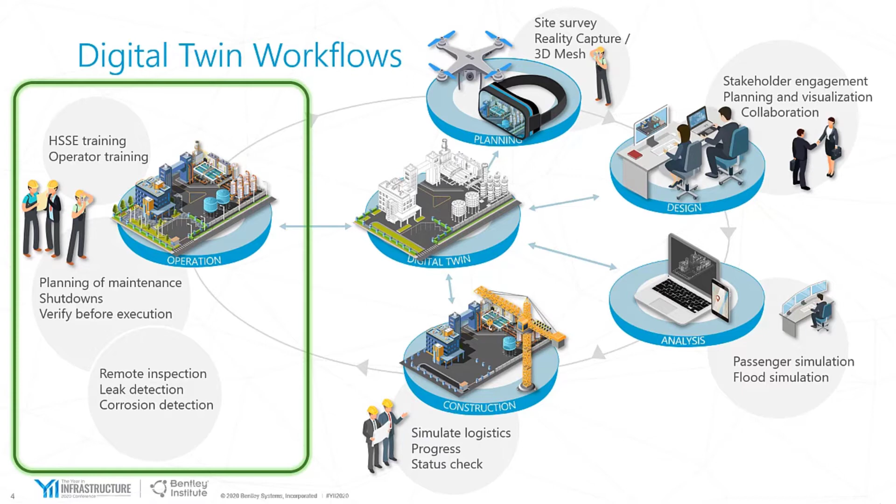To do that, I want to look at these use cases. I want to look and dip into some simple visualization. I want to show how we can expand and build on that to provide operational information, and how you might use it as part of a familiarization process for new workers or unfamiliar workers that are unfamiliar with a particular location.

I want to step back and show how visualizations and how we can link that information we have into a more traditional reporting. So for each of these, I'm going to step through a simple use case and give a brief demonstration and then step on to the next.

So really, what I'm going to do to start with is just show an example of a user using the system in order to step through, find some information that they're looking for about a particular asset in the site, and then say, I'd like to see that asset, and navigate some further information from there.

So here we have the AssetWise ALIM interface. We're going to search for a pump. That is PP3101. It gives the functional information of the centrifugal pump.

And here we are immediately given the tag information, so you can see there's lots of attribution about that tag that's available, as well as the related information.

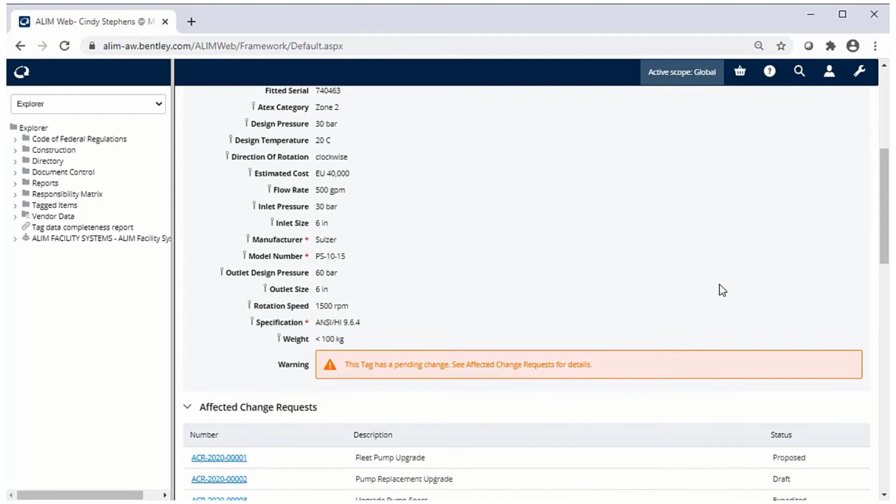We can then also see the history of this tag and what equipment has been installed in there, as well as the auditing that has gone into the updates.

But what's most important, we're going to go and see this asset from a visual standpoint within the model. So we've loaded the model and we zoom right into that asset.

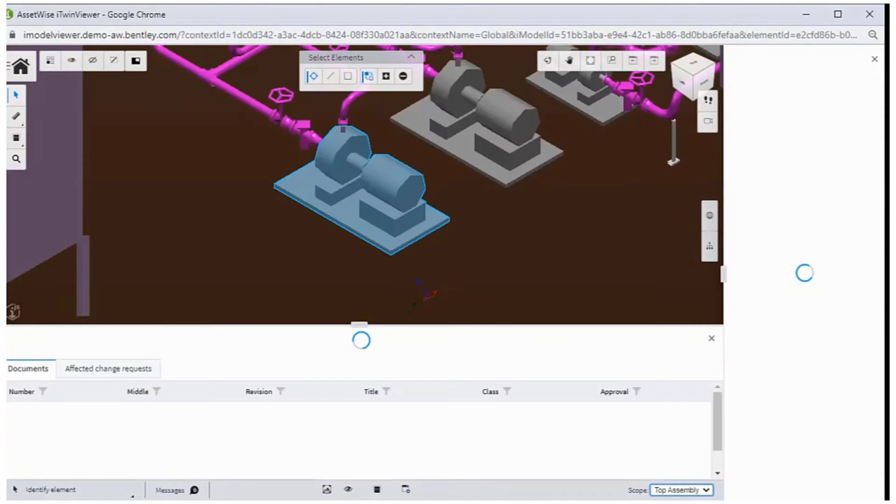We can see it highlighted, and it's possible to work around the model and click on other assets. So for example, now that we've selected this pump, you could see again the asset and attribution information on the right.

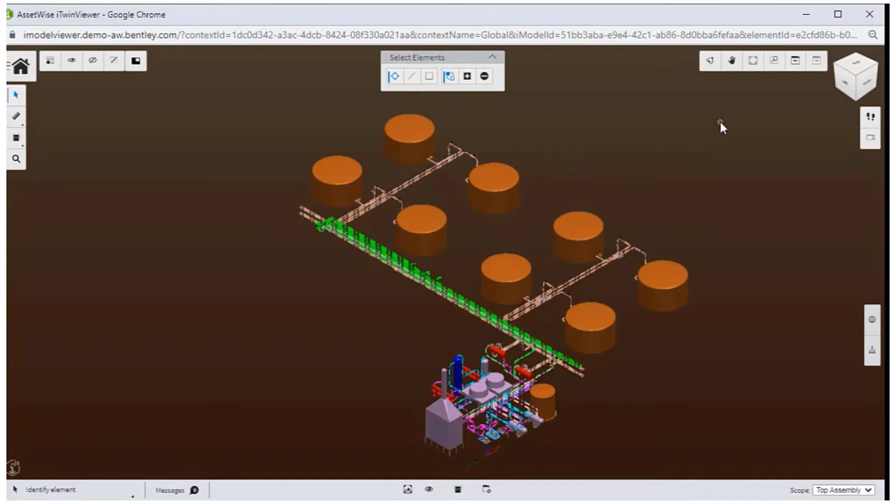So a very, very simple example of how easy it is to navigate to a piece of equipment and view that piece of equipment in the context of an engineering model.

The next level is seeing the operation data in context of the 3D model. The operational data includes the parameters of the assets, the documentation related to the assets for defining and maintaining that asset, as well as the planned changes. The visualization capabilities with the AssetWise ALIM system gives us these additional functionalities.

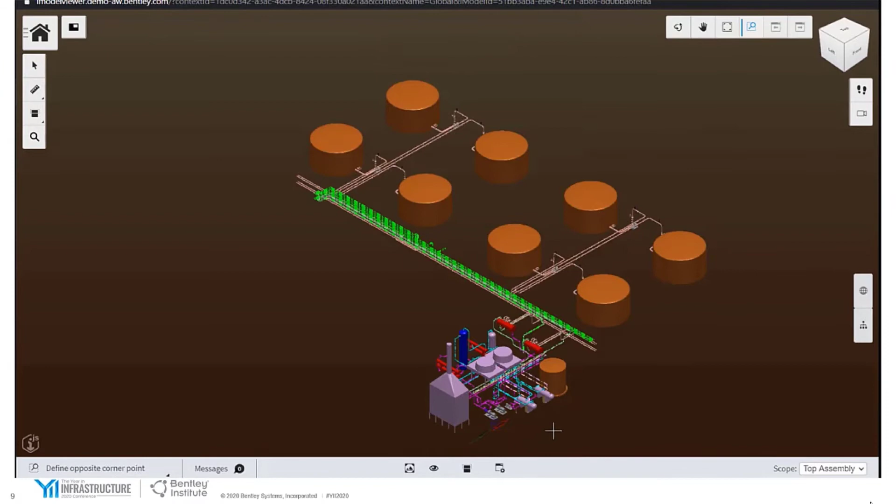This time, I'm going to start with the model, which shows the tags associated to it. We're opening the viewer to give the immersive visualization for the assets in that model. We'll start with the full model, then zoom into the area where the same pieces of equipment are located and select a pump.

On the right side, we can see all the asset functional information for the equipment, such as the flow rate, and in the panel at the bottom you can see the documents related to the equipment which are needed to operate and maintain it.

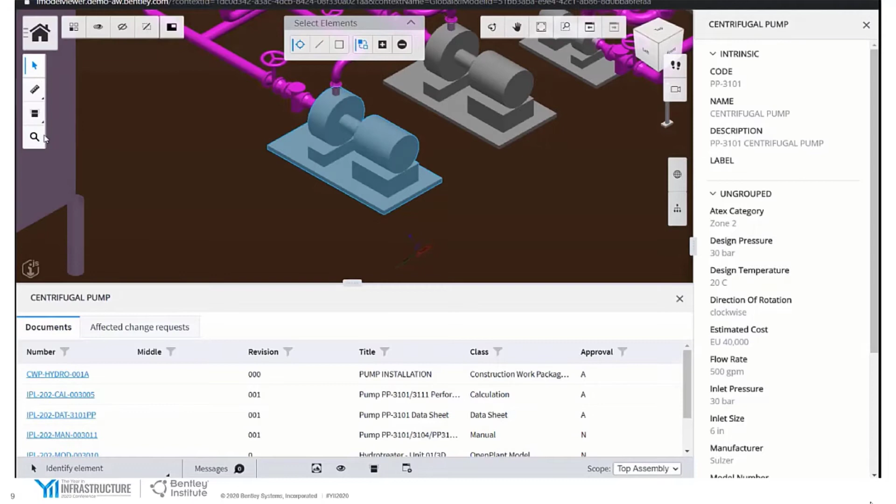For viewing the documents associated to the equipment, we can easily navigate to ALIM and access the document and see the details. Going back to our digital twin, we can also see the proposed changes for the asset. When we click on the change request, we can navigate back to AssetWise ALIM to see the full details of the change package that includes the asset's changes.

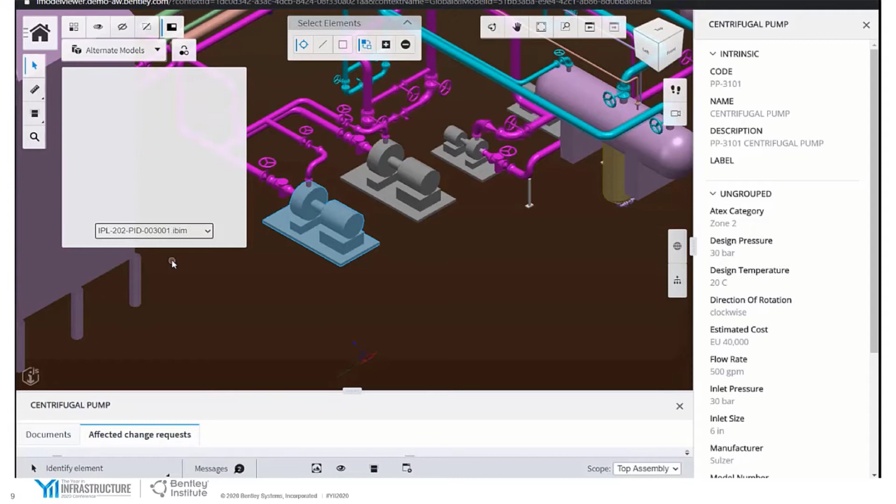We also have the ability to superimpose - we call it picture-in-picture - the capability to take other views of this particular asset. In this case, we've got a P&ID, so we can see a schematic of where this asset fits in the overall system. To see the asset listing related to the P&ID drawing, we can leverage the visual filters.

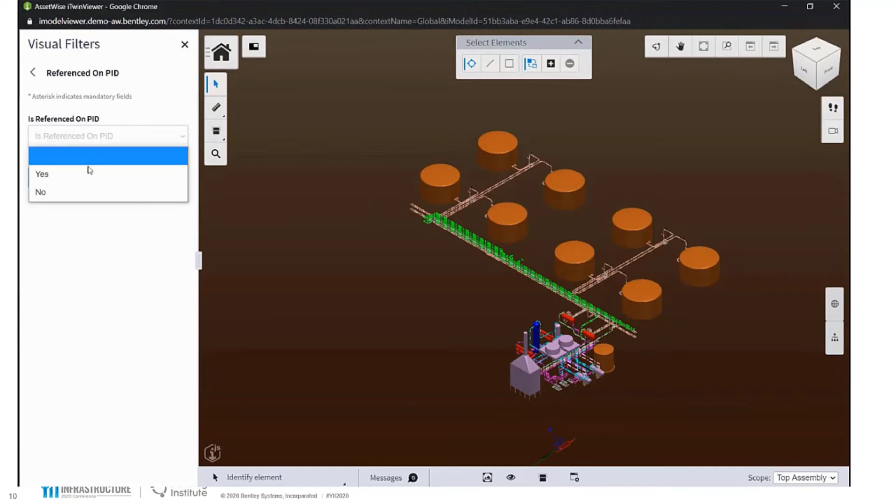Let's go back to the full screen view and look at some of these filter capabilities. The referenced on P&ID filter provides the visibility and listing of the assets associated to the P&ID drawing. We can see the details of the asset that we select, as well as search on some.

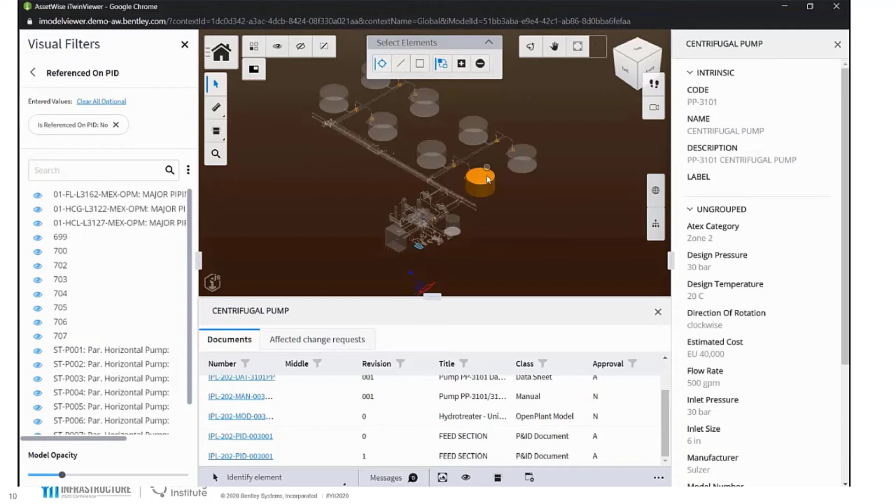We could do the reverse and also see which ones are not on a P&ID or associated to a P&ID, and see those details. Another filter I'd like to highlight is the operational status filter.

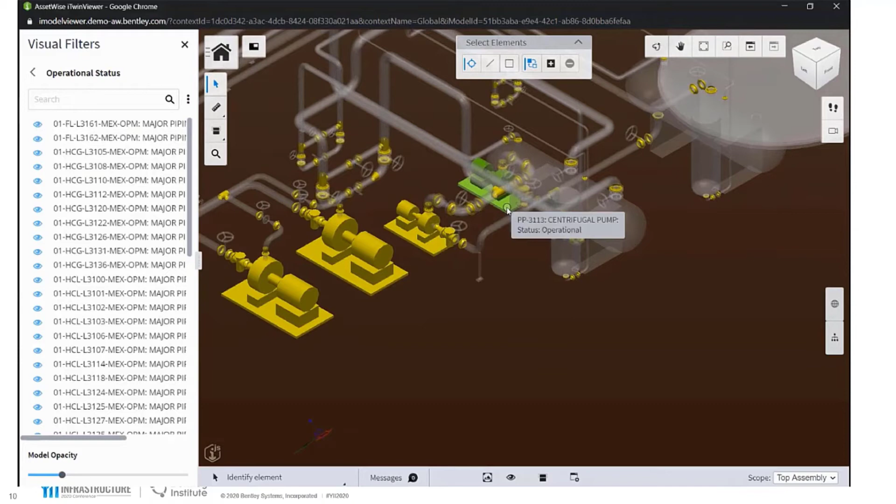With this filter, you can see the asset status in a visual context. This is helpful when you are working and planning in a specific area of the facility. It provides a quick visual assessment of the equipment, determining what changes may be pending, as well as seeing the equipment detailed information.

Having this non-graphical information easily accessible in your digital twin provides a holistic view of your operational information necessary for doing your job. So you can see how this visualization can quickly become the central focus of finding out a lot of relevant information about a particular selective asset within your site.

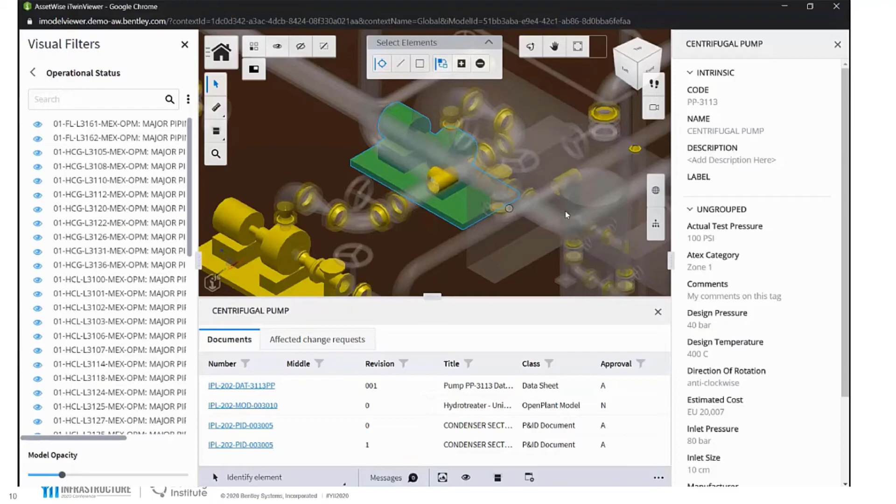Obviously, having a 3D visualization gives a lot of power and insight into what an unfamiliar worker or specialist contractor might encounter when visiting a location. But actually, there's a growing trend across many industries to reduce manpower, to put people out of harm's way. It's a very significant safety improvement, and many sites are becoming unattended.

Therefore, the need for infrequent maintenance, occasional visits - these are all driving a need to do familiarization in a much safer way. And of course, the 3D view gives us powerful capabilities to visualize and see the facility without actually visiting it - from the safety of your own desk.

It can provide a lot of context, not just to prepare for the specific work, but to see what other conditions you might encounter when undertaking that work in the surrounding area of an asset. A very simple example is using the model to measure the distance and clearance between two components for maneuvering a new piece of equipment that may be installed.

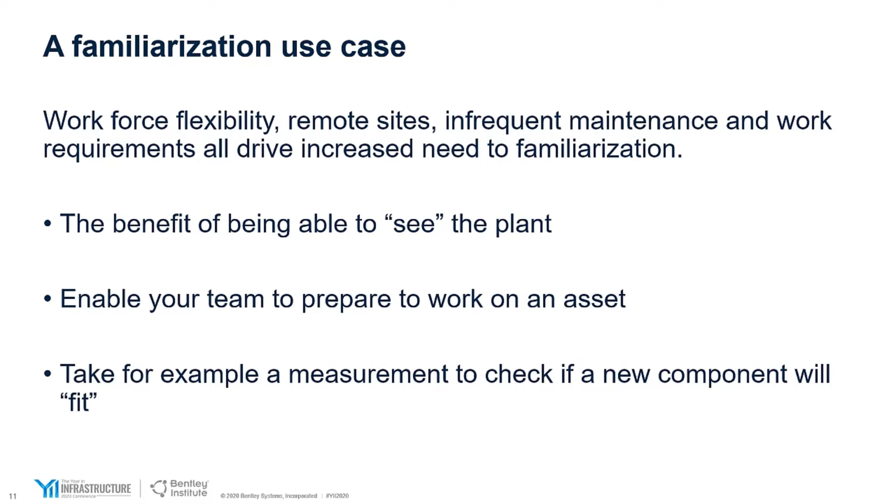In this instance, I want to show you how we can use reality modeling technology with the immersive visualization to give you a very clear representation of the actual site. We're zooming in - it's the same model we were looking at before with the reality model as a mesh, and we immediately see, when zooming in further, the same pump.

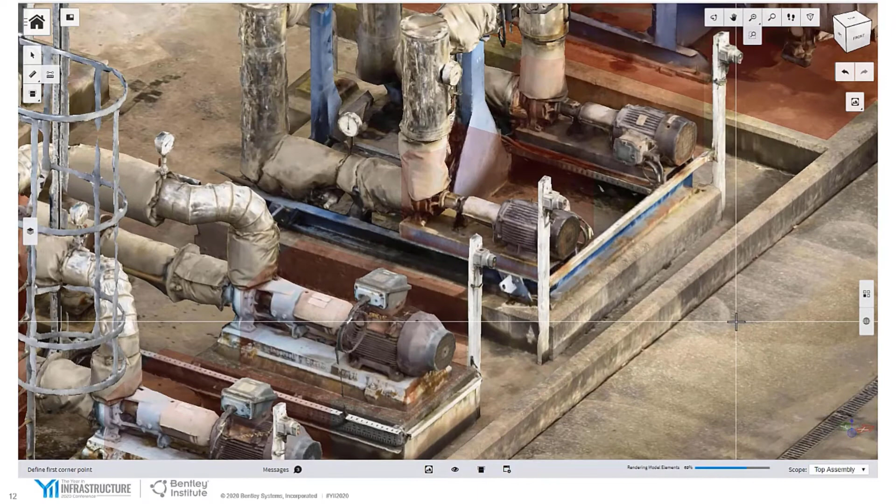When we select the pump, we can see the attribution and the related information, and we have access to the same 3D model of that pump as an alternative view. This then enables us to link the 3D view to the reality.

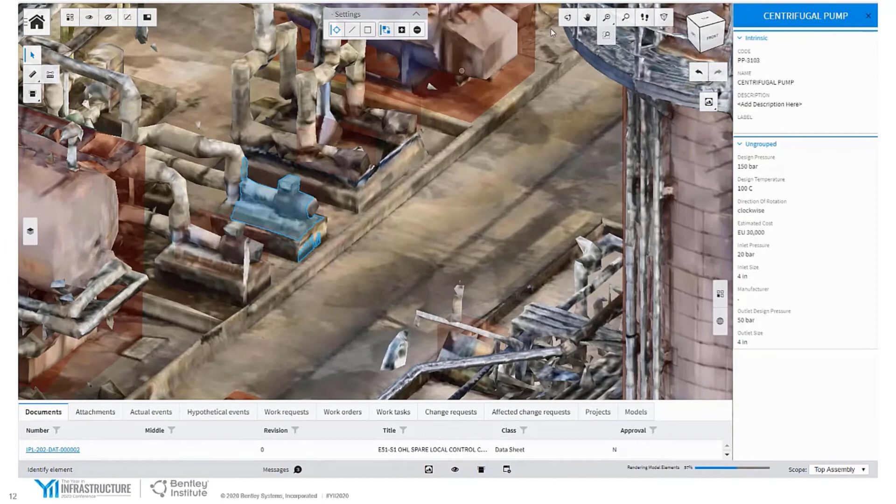And obviously, if you're planning some work in this area, you can immediately see and understand the access requirements, whether it's scaffolding or a route or a new piece of equipment.

The use of the reality model gives us a completely immersive experience for an unfamiliar operator, while the hotspots give an operator access to the detailed information about the equipment that you can see. Very much the best of both worlds. You can see that an unfamiliar operator who hasn't visited the site before could get themselves very, very familiar with all the aspects of this facility.

It's worth noting, you can start small with a simple overview or a section of your facility, have success with digital visualization and work processes, and then repeat and expand. So immersive visualization is able to take advantage of the reality model from the ContextCapture capability that Bentley offers. And even when you don't have an engineering model, you can get a very realistic representation like this.

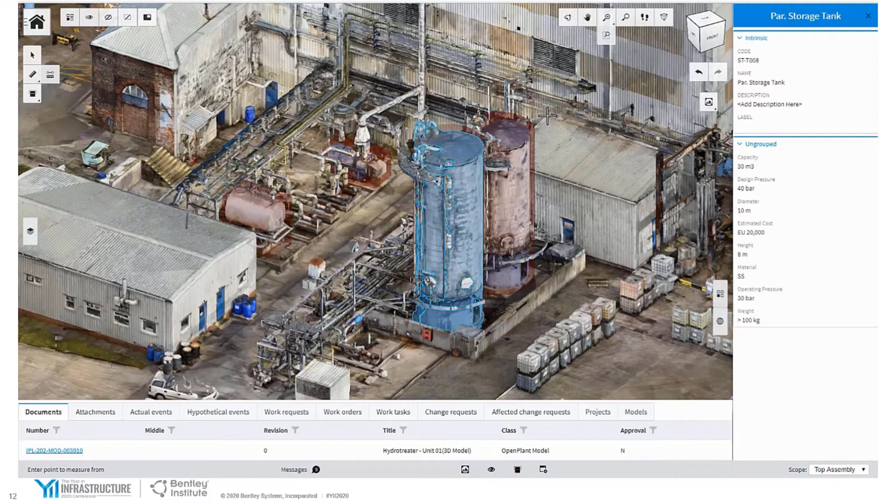Immersive visualization provides the powerful operational data context for managing and planning work on site, and geographically being able to see it visually. This capability is instrumental for making informed decisions, so when work is undertaken, it is done in an efficient and safe way, such as changes in a confined space, or a tag-out or lockout procedure needed to isolate critical pieces of equipment to work on.

It's important that we don't only focus on these 3D graphics. The concept of a digital twin is much richer than just the 3D graphics. In the classic iceberg, the graphics are the visible part at the top, but there's a huge amount of information underneath that visualization, and quite a lot of that is best represented using some traditional reporting, and more importantly now dashboards and interactive querying and reporting can be done with our standard dashboard reports and leveraging Microsoft Power BI for detailed site-specific reports, for example.

Traditional reporting has a key role in tracking progress and monitoring ongoing performance, and enables you to uncover a lot of insights into your own data. I want to show you our standard dashboard reports. Access them from either the person icon at the top or from the dashboard reference card.